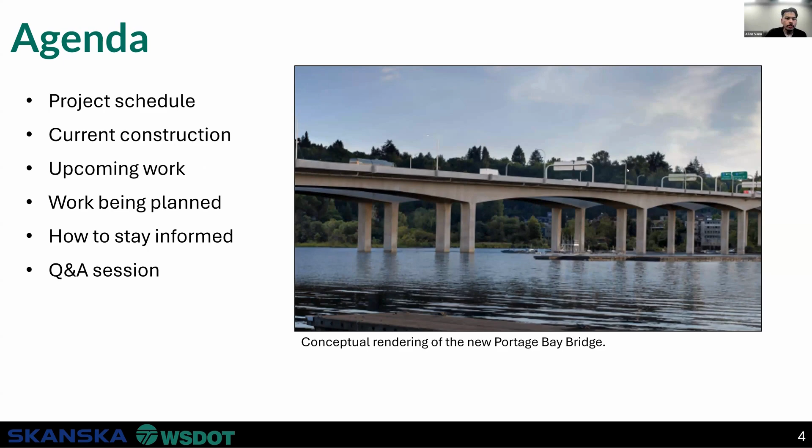All right, thank you Alan. Hopefully folks can hear me okay, if not please let us know. So like Alan mentioned, I am Robin Clark, a project engineer and the community liaison with Skanska for the SR 520 Portage Bay Replacement Bridge and Roanoke... oh, I buggered that one up again. Man, I'm going to have to work on this one. I think this is the third time I've done that. SR 520 Bridge Replacement, Portage Bay Bridge and Roanoke Lid Project. One of these days I'll get it.

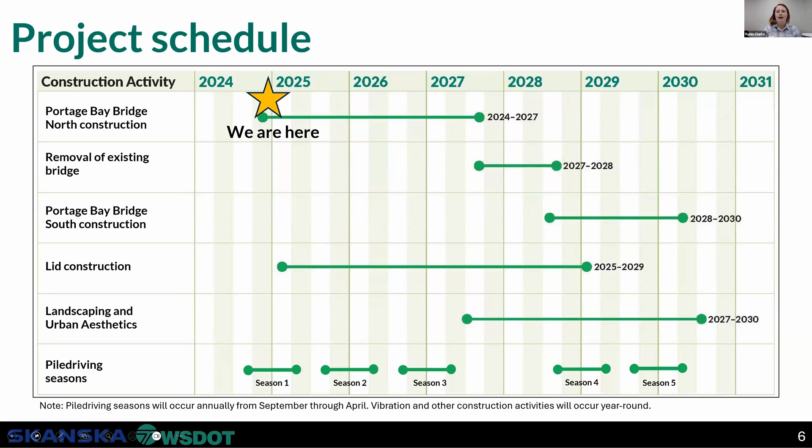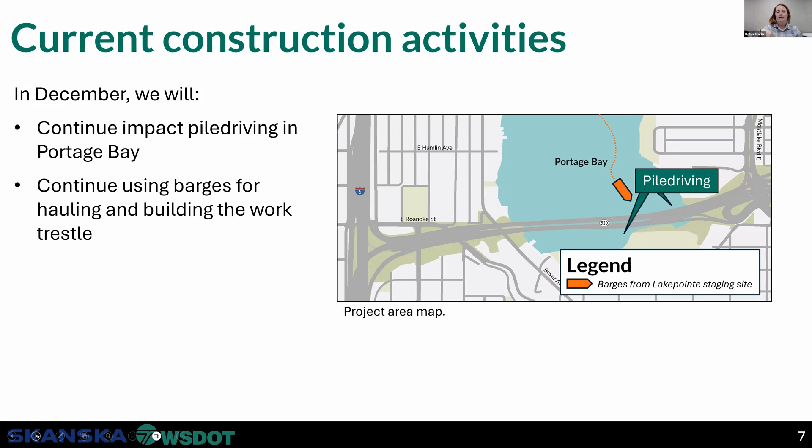So our current construction activities for December: we are continuing our impact pile driving for Portage Bay. Our work bridges are on the north and south side of the existing 520 bridge. These are helping us facilitate what we'll eventually do to construct the new Portage Bay bridges and remove the existing SR 520 bridges. We'll continue pile driving and building out those work bridges, and continue bringing material in via barges from our yard off-site.

And then kind of an upcoming look ahead for the next 3-ish months, January into February, March.

We'll continue with our barge work and our pile driving, working our way out on the work trestle and work bridges. We'll begin some of our tree and vegetation removal in probably about February of 2025, followed by some utility work. We'll begin some short-term Bill Dawson Trail closures, and we'll begin our acoustic fence installation.

And again, we'll continue our impact pile driving. Just a reminder that our impact pile driving season will end at the end of April 2025 for in-water work. We may have some land-based pile driving after that, but it won't be as much as what you're experiencing throughout this season.

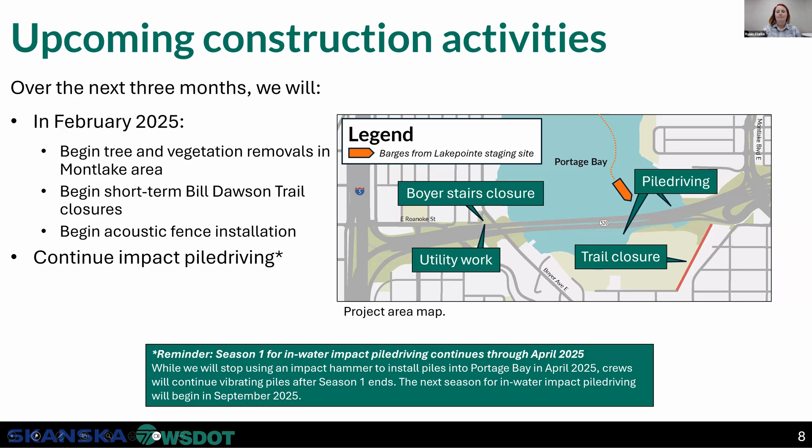So throughout the bigger picture of next year, all the way into the end of 2025, we will continue our work trestle construction. We'll finalize some of our design for the Roanoke lid and temporary overpass, which I'll get into towards the end of our presentation here. I will talk a little bit through some of the detours that we have planned for that as well.

I apologize, there's a little bit of a capitalization issue there. Continue refining detours for people walking, rolling, or biking. Specify trail or lid. Interesting. We have some edits to do on our slide here.

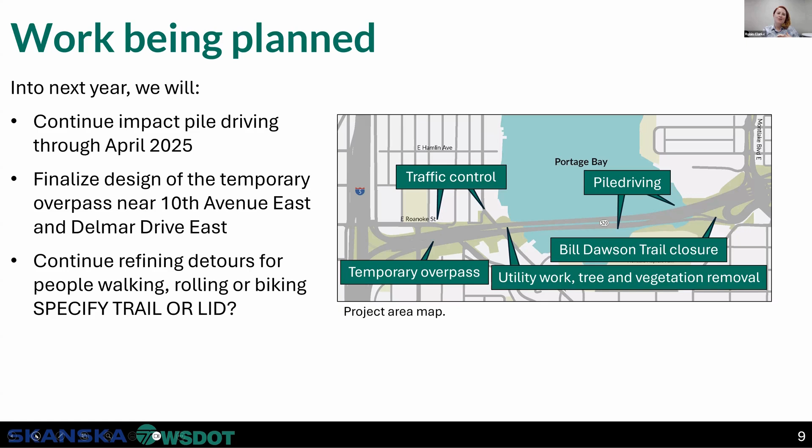So we have throughout 2025 some utility work, temporary overpass work, and some Bill Dawson Trail closures coming up, as well as some traffic impacts that I'll walk you guys through throughout the next year.

All right, getting into some of the current work details. So talking through our current construction details, with the pile driving, we also have our north heading and our south heading that I will talk through.

We have 2 cranes out there right now, and we're looking to bring a third towards the end of this month. That third heading, or third crane, is going to start on the south side, or the bottom side, of what you see on the screen right now. Right now, both of those locations are moving towards the west, or towards the left, and they'll continue building out those work bridges. Once that third crane or third heading shows up, those 2 cranes will work opposite of each other towards the land.

Also, current construction activities I'll talk through are the SDOT curb ramp sidewalk work that are ongoing. Not much that we have with our activities to do with that construction, but it is something that we are actively coordinating with them just to make sure that our activities don't overlap with their work.

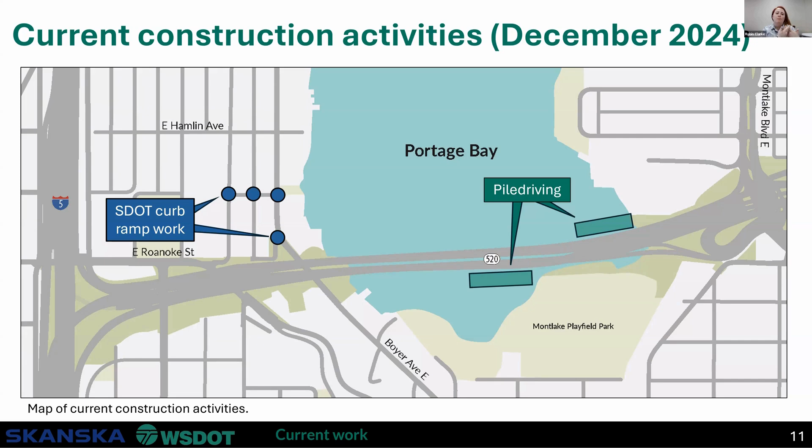So getting into the details of pile driving, again, we have our work trestle or work bridge -- I use that a little bit interchangeably there. What you see in the picture right here, highlighted in green, is our work bridge. This is going to allow us to bring our construction material, equipment, and personnel onto the temporary platforms so we can construct and remove all of the infrastructure needed to build our project over the water.

To do that, we have to install piles as the foundations for the temporary bridge. There will be around 700 piles -- I think it's around 710-ish, a little bit over 700 piles over the lifetime of the project, with the bulk of those piles being installed this first season. In fact, I think our goal is 379 piles installed for this first season.

That's our goal. As the piles are installed and as those orange stars are working in their respective directions, the crews also build out the platforms, so they kind of work in that systematic process. So as you guys experience the pile driving process, there might be days or periods of time where you don't experience consistent pile driving, and that might be because they've stopped to work on some of that platform build out.

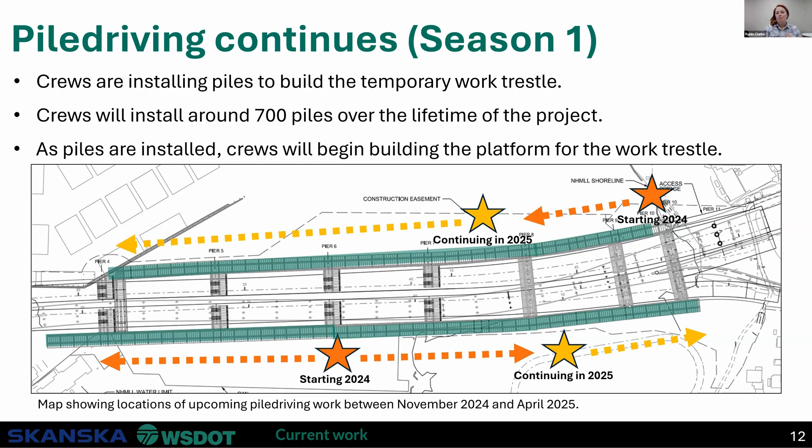So in December, our current progress is in those 2 locations. We typically install between 2 and 8 piles a day, and we've worked in those 2 green sections there that you see on the screen. We'll continue to uptick on our progress as we get a little bit more streamlined in our system.

Especially as we get that 3rd crane into its location and get them started. There's a couple different reasons that we kind of see that progress start to flow a lot better throughout the start of construction and progression of construction.

One of those reasons is testing and establishing baselines. We have some underwater noise monitoring that we do at the start of construction. That takes a little bit of time to establish that baseline, get the system worked out, get some of our challenges figured out from the start of monitoring to actually getting into the rhythm of construction and the rhythm of pile driving. Once that gets worked out, we're able to find that rhythm, maintain a really good system, and keep going and pick up our progress.

Another thing that we kind of work through is just figuring out the consistency with our crews, getting them to work together in a new location, new job, new rules and regulations. Once they figure out their flow, it goes a lot faster.

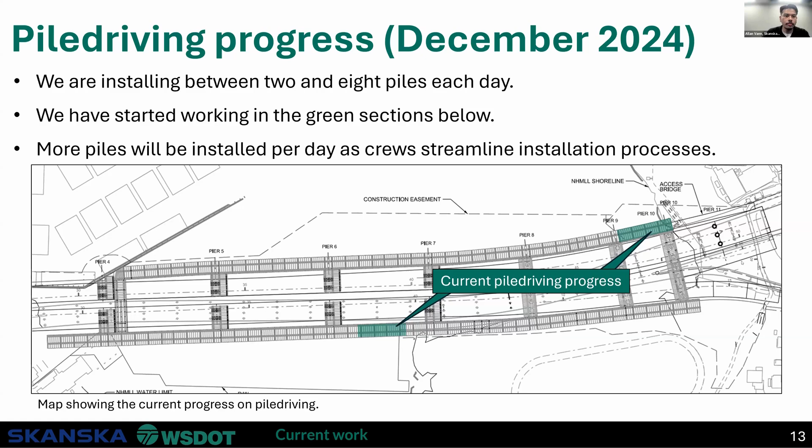All right, with that I want to go into a little bit more with the seasons, and then we'll move on to some more content with construction.

So the last little bit on impact pile driving, again continuing to talk through our seasons. We have September through April, and our work schedule is Mondays through Saturdays, 6 days a week. Typical hours are Monday through Friday, 7 to 10, Saturdays 9 to 10. We do have some Sundays planned later in the season, but right now we're not working Sundays. We'll also have some pile driving on land later in the year, in that summer timeframe, but it will be significantly less than what we're conducting right now.

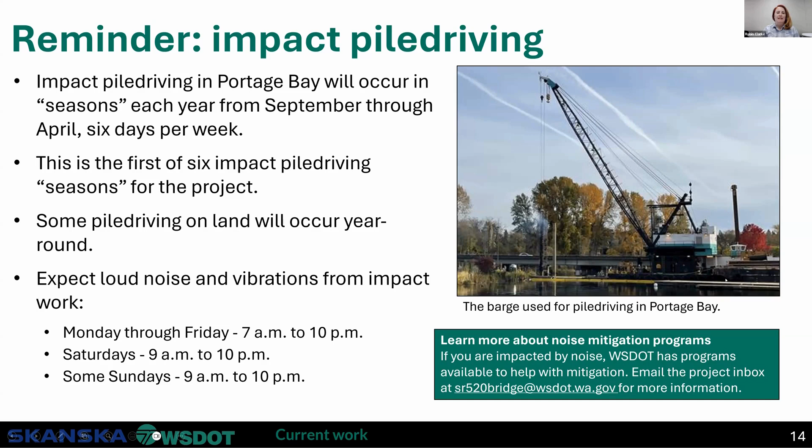Now on to vibratory pile driving. The difference is that it's just vibrating those steel casings into the ground rather than hitting them and making that loud impact noise. That occurs year round, so we'll continue that work. One challenge that can slow things down is ground conditions underwater in the bay — if we hit issues with the soils and can't vibrate the casings into a certain area, we have to use impact pile driving to get through those conditions. But where we can maximize vibratory pile driving, we try to do so, and those areas will continue vibratory driving throughout the year.

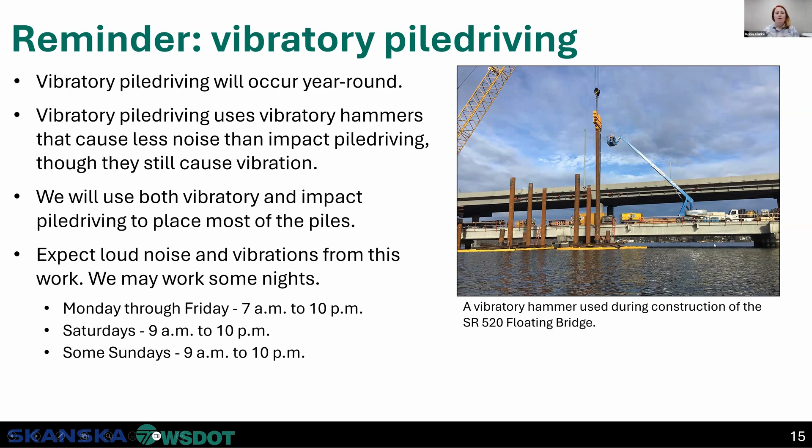All right, enough about pile driving — on to trees and vegetation removal. Previously in our monthly meetings, for those returning, we had some schedule updates. We originally planned to start on the Boyer Hill side, but we've swapped that, and we're now scheduled to start next year on the Montlake side, near the Bill Dawson Trail. I'll explain a bit why, but as an overall highlight, this is the tree and vegetation removal schedule and general limit for our project. We expect to start that work in early February of next year, on the Montlake side, in the red zone you see on screen.

We do have tree removal notices. For those who've been out on the Boyer Hill side, you may have seen those — yellow ones mean we're going to remove the tree, and lime green ones mean we're going to protect it. I mention that because in the red and orange zones on the map, it doesn't necessarily mean we're removing every single tree in that area. We are removing certain trees, but some trees in the area may be protected. We just want to note that area because it's our project limit.

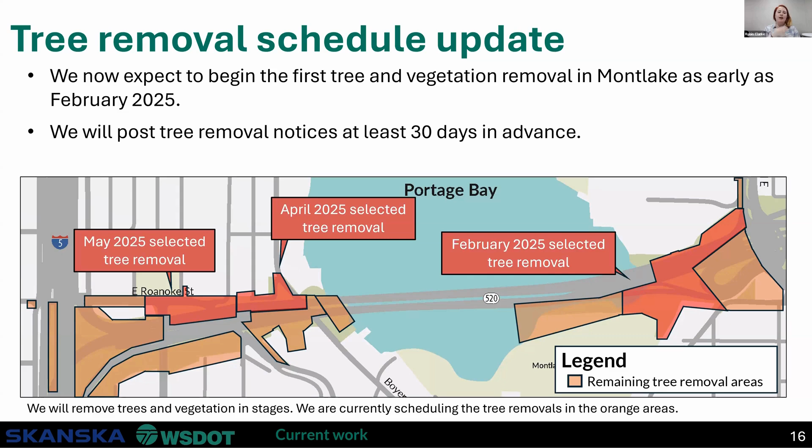So we'll start on the Montlake side, then flop back over to the west side of the project, the left-hand side, back to the Boyer Hillside area in April of 2025. We'll keep going west into the East Roanoke Street area in May of 2025. Then in the orange areas, we'll continue scheduling following that in May 2025 and periodically throughout the rest of the year. We'll keep updating you as we schedule those activities.

Touching on the updated tree removal schedule and why we made that change — we had some updates on our utility side. In talking with our utility team, we wanted to make sure we weren't removing trees too early, primarily from an environmental standpoint, and not exposing the hillside during winter and the rainy season. We know how rainy it gets here in Seattle, so we're trying to manage potential erosion issues throughout the winter.

So what we elected to do was wait until spring and make sure that we were removing trees closer to the start of our utility work, so that we are basically removing the trees and then getting our operation in there to start our utility relocations. I'll touch base on the utility relocations in a minute, but for sake of context, that's why our schedule has changed in that regard.

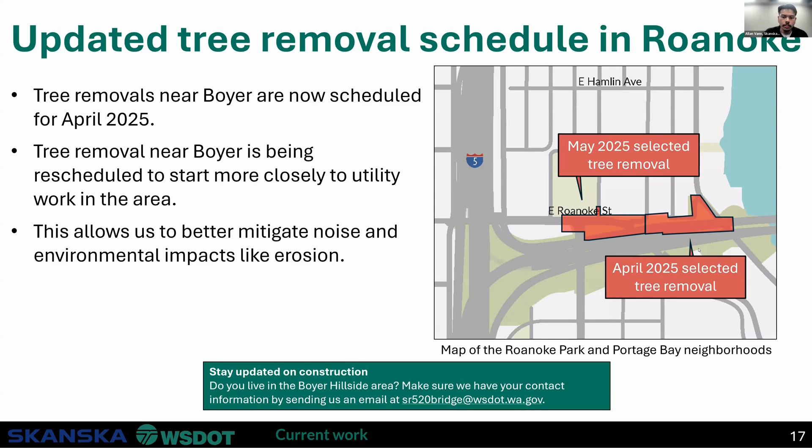We are also tentatively not planning on working the 23rd and 24th of December, Christmas Eve, the 24th, and the 23rd. We are tentatively not planning on working those days, but we have those as a placeholder in case some of our pile driving schedule has some issues.

Like I talked about with our pile driving and foundations, we've been running into some challenges with that. So we're just working through those, and we have a little bit of placeholder in our schedule on the 23rd and 24th. I haven't put that on our slides, but we are hoping and planning to not work on the 23rd and 24th to give our crews a break on those days. So those are our current holiday schedule plans, just so you guys know.

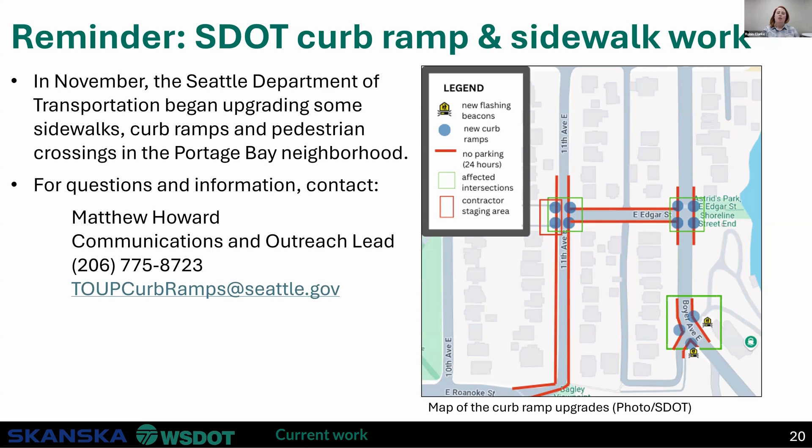Just a little more detail on our upcoming work. On the utilities I mentioned, with tree clearing on the Boyer hillside starting April of next year, we're also getting into utility relocation for Seattle City Light and Seattle Public Utilities. Our major work is scheduled for August 2025, but we have some minor work scheduled for the April-May timeframe. Part of that includes traffic impacts on Boyer Ave, hence our coordination with SDOT and East Roanoke Street, and another part includes the Boyer stair closure adjacent to the hillside. That's just an adjustment to our schedule so we can align it with our construction elements and utility schedule.

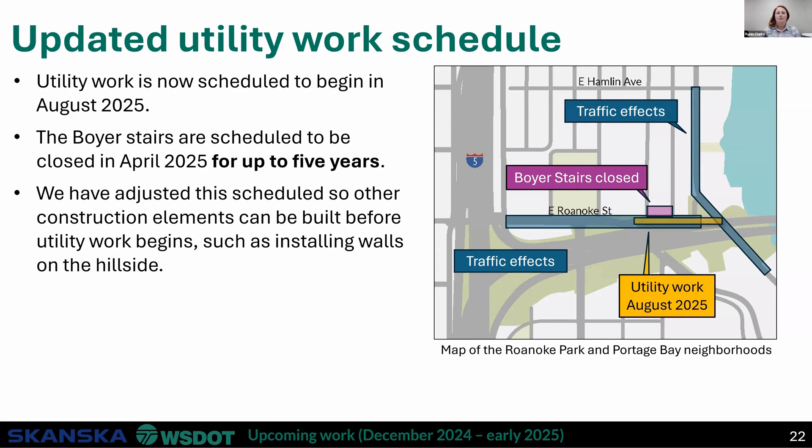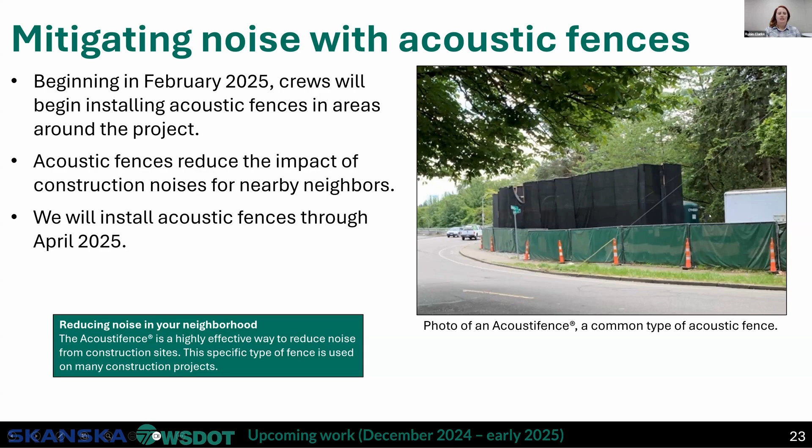Touching on mitigating construction noise: part of our project is to install acoustic fence in certain areas, particularly sensitive areas where we'll have a lot of activity close to neighborhoods. Starting in February of next year, we'll be installing acoustic fence in these key areas. On the screen, you can see that black fence with fabric on it - that's our acoustic fence, which we'll install February through early spring to help dampen the sound.

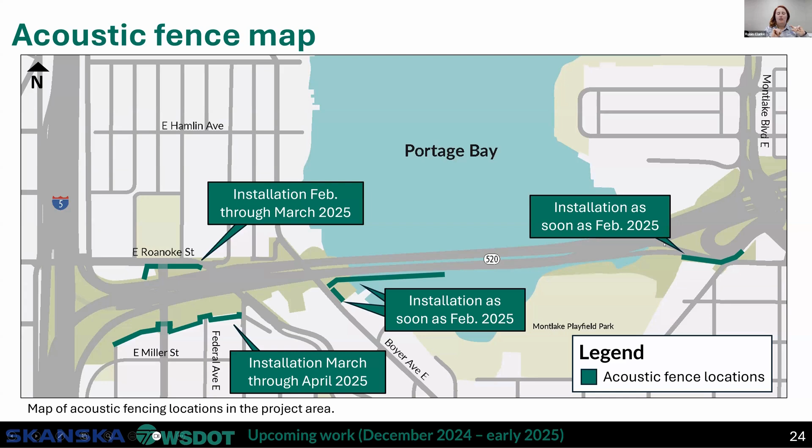This is a map of what that looks like. The green lines on the screen are the areas where we'll be installing the fence, starting on our Portage Bay bridges in February, depending on where we're at in construction, on both the east and west sides. Then February and March on the north side of our lid area, and March and April on the south side of our lid area, we'll get started on installation.

Touching base on the Bill Dawson trail closures. As I mentioned, our tree and vegetation schedule starts in February on the east side of the project in the Montlake area. Part of that will be short-term closures for Bill Dawson Trail - very periodic, maybe a couple days or weekends to clear larger trees for safety purposes, or periodic closures of 15 minutes or less to cross equipment, personnel, or materials during the day. So very short-term closures during that period of time.

Eventually we will have a long-term Bill Dawson Trail closure. We're finalizing that date, probably summer to fall of 2025, and that will be a 5-year closure of the Bill Dawson Trail. That's a long-term closure, and we're working through finalization of the detours.

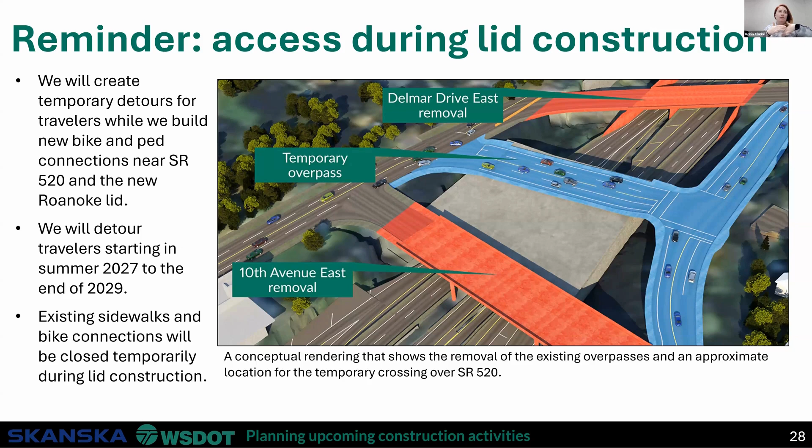Construction would get started once we get through the design progress. The detour itself and the overpass opening would not start until mid-2027, and the swap back to 10th and Delmar would be at the end of 2029.

The other part we're working through is pedestrian and biker access over that overpass. We're still in the early stages of design, so that's why it's kind of an open topic here, and we'll continue to talk about it as we develop this design.

We're working through potential detour routes to make sure we maintain safety for users - bikers, cars, and pedestrians - to maintain adequate crossings in all directions. We're working with SDOT, Parks, and everybody to make sure it's designed adequately.

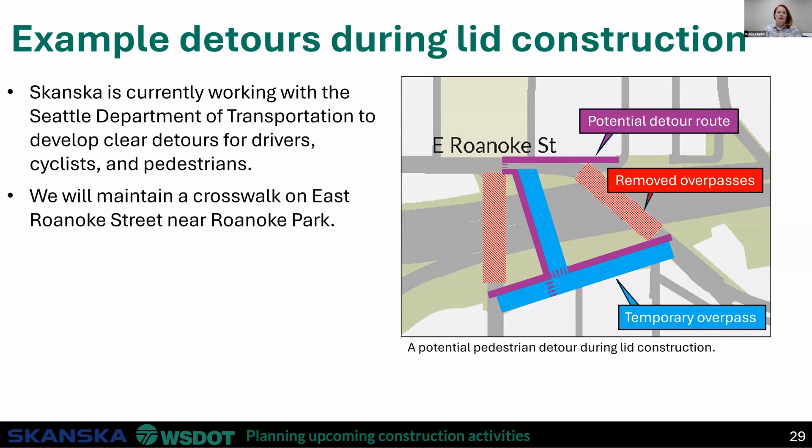There are certain constraints with the limits of that overpass and its width, but we're going to keep you guys updated as we get more details through that design.

Just a couple little notes on that: with our preliminary design, we already have some of our sidewalk and bike connections, crosswalks, travel lanes, temporary signals, and detour signs figured out, and we'll continue to work through those details.

But the challenges we're working through now are the actual widths of those lanes, the types of bike lanes - whether separated or integrated with the road lanes - the actual signal timing and how that looks, and the general enhancement of safety for all travelers.

All right, so staying in touch and Q&A. How to stay informed - Alan, I'll hand it back to you to run through this and open it up for Q&A. I just want to say thank you to everybody again for listening to me.

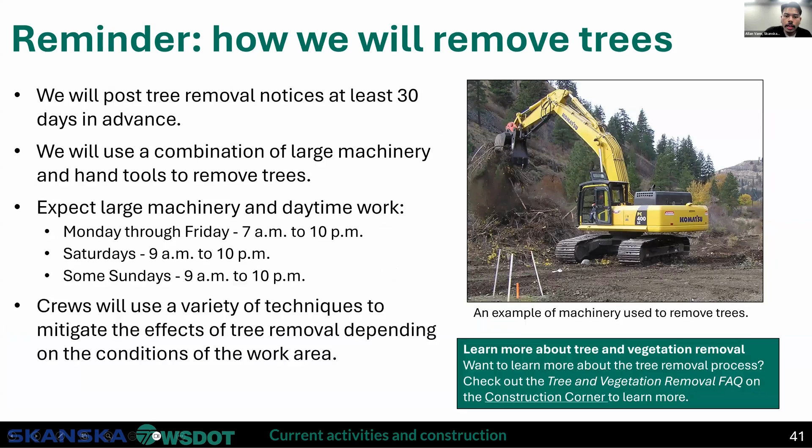We have 4 minutes left, and 2 questions still in the queue. The first is regarding the closure of the Roanoke Stairs: what is the alternative route for pedestrians who currently use the Roanoke Stairs, what will that route be, and why are the stairs being closed in the first place?

So the alternate route, we don't have a formal alternate route for the stairs at this time, though the alternate route will essentially be going around the stairs on the local streets using sidewalks.

How are we accommodating those who walk around the neighborhood when you close important walking and biking routes? I would say the stairs are an exception to having a formal route. Every other walking and biking route will have a formal detour that we design and get approved through WSDOT and the City of Seattle. All of those will be signed with detour routes, and we try to minimize the distance as much as possible while maintaining something that is safe, effective, and ADA compliant, giving people access to the places they want to go.

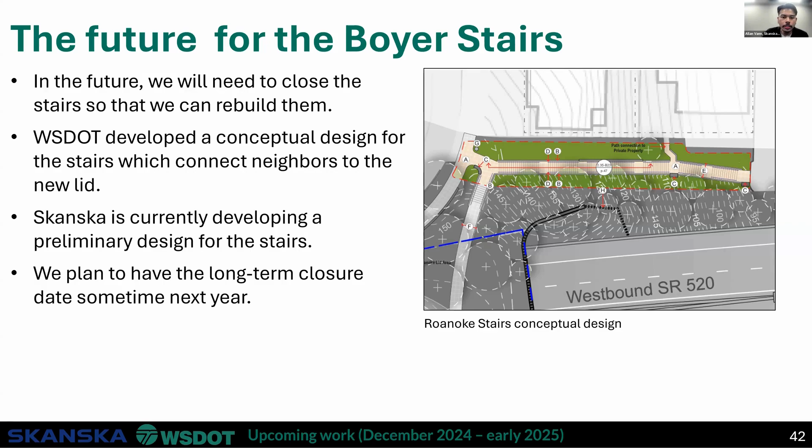What feedback is meaningful with the Bill Dawson Trail? Previously, Kara has shared feedback and the answer has been, this is a plan, sorry it's disruptive, we can't change it. How can we actually engage in a discussion?

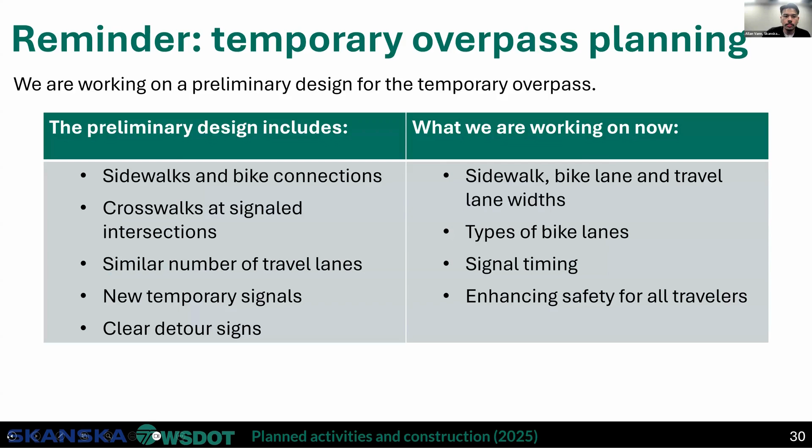I can touch on that a little. This Saturday, during the Montlake Bike the Bridge event, members of the Skanska Portage Bay team will be out near the area collecting feedback from folks. As you may have seen from the map we shared earlier, we have 2 potential alternate routes during the trail closure, and we're open to discussions with anybody trying to figure out feedback they may have regarding those detours, whether it's the existing conditions of those streets, the grade of those streets, or maybe those streets just might not work for some folks.

So we're open to hearing any and all feedback. If you aren't able to make it to the Bike the Bridge event this Saturday, you can reach us via our project hotline or our project inbox as well. Robin, is there anything you'd like to add to that?

Yeah, I would say just the type of feedback that was meaningful, exactly what you said, Alan. Street conditions, certain streets that we should and shouldn't avoid. I can't say from our standpoint that we can promise things from the feedback, but we do want the feedback from the community, because at the end of the day, you guys are the users of those detours. We want to incorporate your feedback as much as possible, and having your feedback is what we can take to the table in our designs. We can have those conversations with WSDOT, the City of Seattle, and our own teams. So emails, coming to the Bike the Bridge event, pop-ups, anything like that, and having those conversations, that would be meaningful.